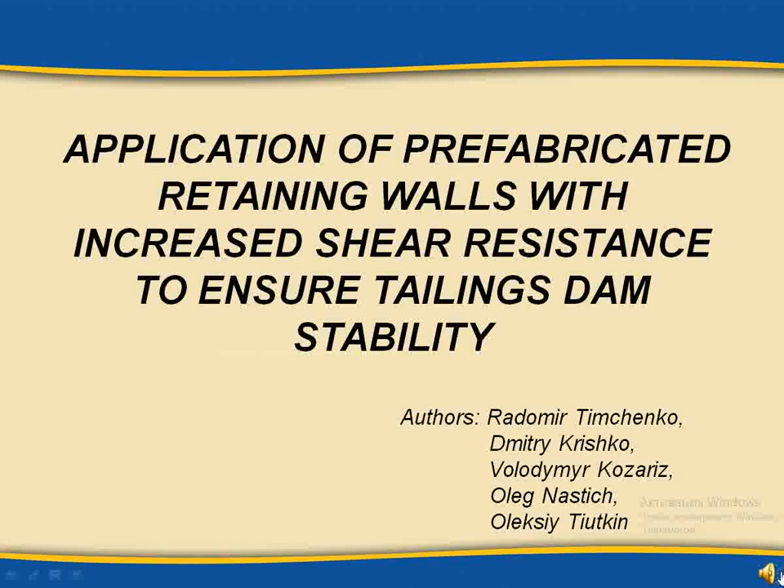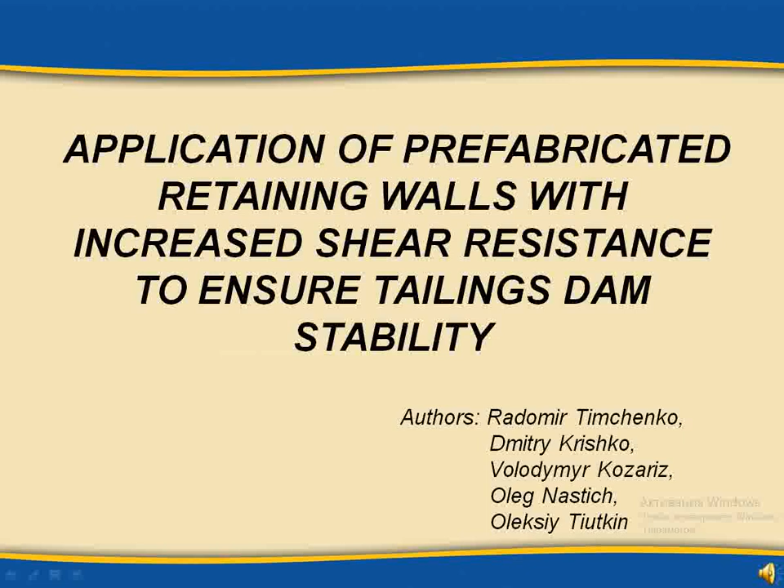Application of prefabricated retaining walls with increased shear resistance to ensure tailings dam stability. Authors: Radomir Timchenko, Dmitry Krishko, Volodymyr Kozariz, Oleg Nastich, Oleksiy Tiutkin.

Accumulation of a significant amount of industrial waste is associated with the development of the mining and metallurgical industry in Kryvyi Rih. The volumes and areas of production sludge and concentration tailings have grown considerably over the long term of operation. This negatively affects the state of technological and environmental safety and worsens the environmental situation in the adjacent areas.

Tailings ponds and sludge storage facilities do not currently meet modern standards that regulate the requirements for operational safety, reliability, stability, and durability as they were designed in the last century. Application of retaining walls is proposed to prevent or avoid the negative engineering conditions of dams and embankments. The development of new design solutions for retaining walls and calculation methods for determining the lateral pressure of multilayer backfill is an urgent scientific task.

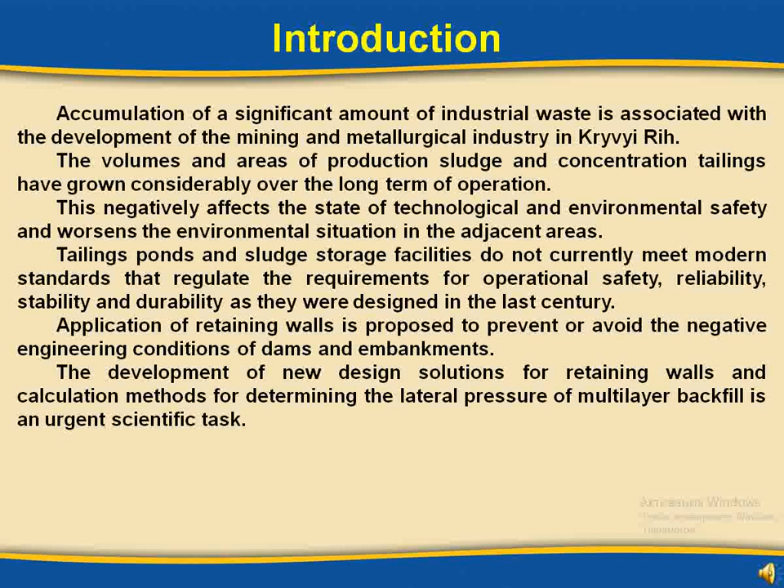The operation of tailings and sludge storage facilities is the subject of research by many world-class scientists, namely Emily Laine, Matthew Kryman, Benjamin K. Sovacool, Donald East, Ruben Fernandez, Carlos Cacciuttolo, Alvar Pastor, Patricio Valderrama, Edison Atencio, John Wates.

Authors who made a significant contribution to the development and improvement of retaining wall structures and methods of their calculation include I. P. Boiko, A. Y. Budin, B. F. Horiunov, V. B. Hurevych, M. P. Dubrovskyi, V. S. Zelenskyi, M. L. Zotsenko, Yu. O. Kirichek, H. K. Klein, V. D. Kostiukov, O. O. Petrakov, M. B. Poizner, V. H. Taranov, R. O. Timchenko, V. H. Shapoval, V. B. Shvets, P. I. Yakovliev, etc.

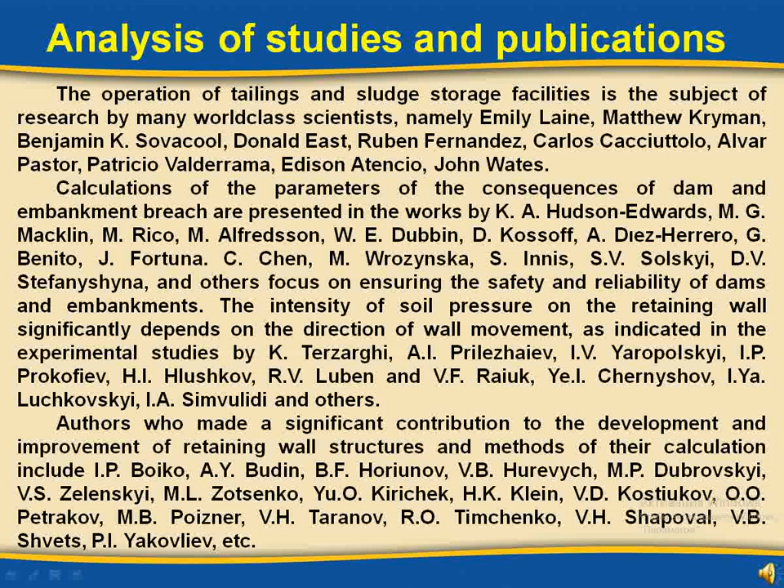The aim of the research is to ensure the stability of tailings dams by using the proposed prefabricated retaining walls with increased shear resistance during the multilayer backfill buildup and operation of the structure. To achieve this, the following tasks should be solved. To conduct an analytical review of the schemes and designs of tailings dams.

To conduct a comparative analysis using the recommended methods to determine the safety factor for the calculated sliding curves. To develop a new design of the retaining wall to ensure the stability of the enclosing dams. To formulate new principles for determining the horizontal pressure on the retaining wall, considering the multilayer backfill and the load on the surface.

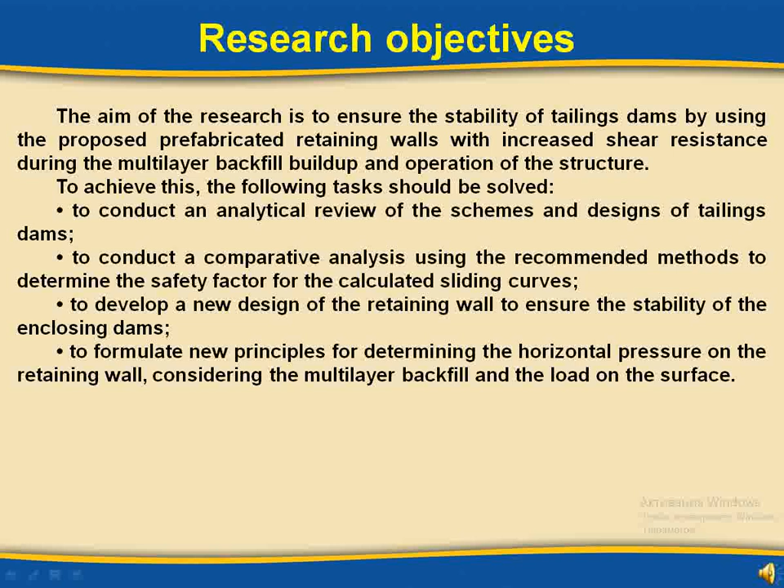In recent years, significant experience has been gained in the operation of storage facilities and the construction of dams and embankments made of waste and overburden. Any type of storage capacity, except for pit and basin ones, requires the construction of enclosing dams or embankments that are washed from waste materials or filled with overburden or local soils. Depending on the technical conditions, enclosing dams or embankments can be built to their full height at once or in stages.

Myroliubivka Tailings Pond is located on Velyka Krokva Gully, its slopes and adjacent areas. Velyka Krokva Gully flows into Hrushevata Gully. The area around tailings ponds is built up with technological facilities and communications. Temporary man-made, rock-filled and hydraulic formations, such as waste dumps, walls of embankments and dams, roads, sludge in tailings ponds, etc., play a significant role in the geological structure of the area. These formations are often tens of meters high.

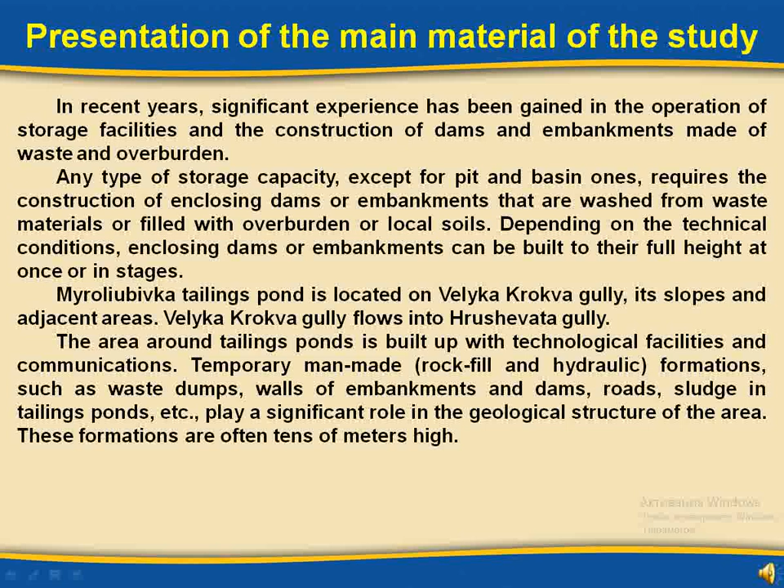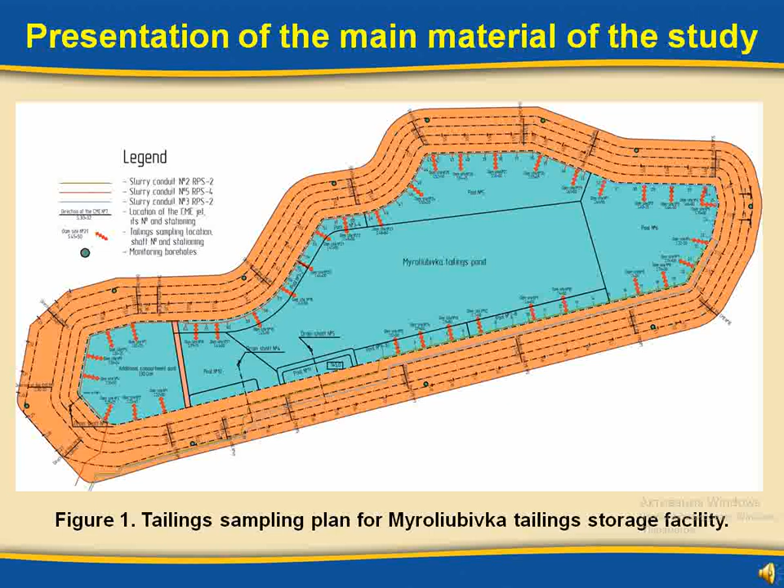To control the quality of the washed tailings, the Geotechnical Control Service, GCS, took 185 samples in 23 boreholes, figure 1, on the beaches at the dike at the 140.0 m level. Based on the results of the measurements, graphs of subsidence are built, figure 2, figure 3, figure 4, figure 5.

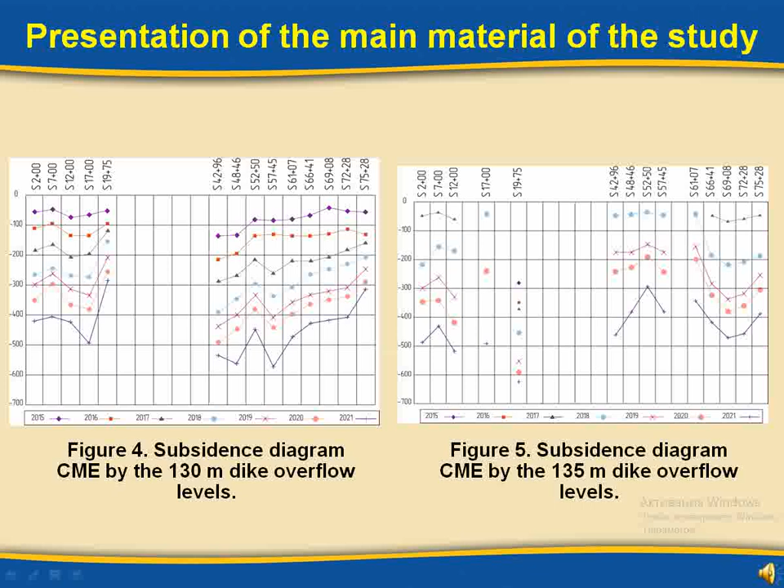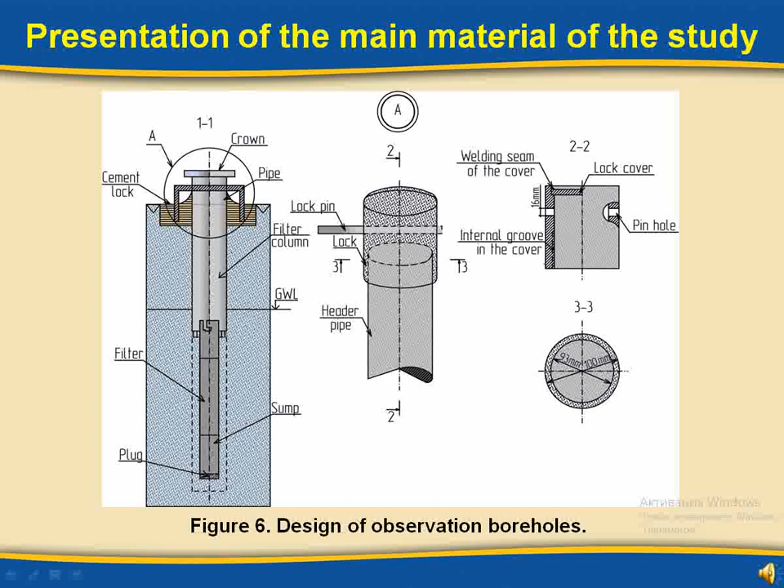To monitor the depression curve, water levels are measured quarterly in piezometers, figure 6, installed on the dams at 115.0 m, 120.0 m, 125.0 m, 130.0 m and 135.0 m crest levels.

Strength and stability of modern hydraulic facilities are assessed by the limit state method, according to which all the initial design values, which are random in nature, are represented by some deterministic values, and the impact of this variability on structure reliability is taken into account by relevant coefficients regulated by the standards.

In determining the dam stability in the vicinity of spillway structure 3, the following design case is considered. As for the main load combination, the dam has a 125.0 m crest, a normal retaining level, 123.5 m, in the upstream, and filtration in the dam body.

The dam stability is calculated by two programs, the Computer-Aided Design System for Ground Hydraulic Structures and the KZU-86K program developed by specialists of the VIOGEM Institute, the All-Russian Research Institute for Mineral Deposits Drainage, Protection of Engineering Structures from Flooding, Special Mining Works, Geomechanics, Geophysics, Hydrotechnics, Geology and Mine Surveying.

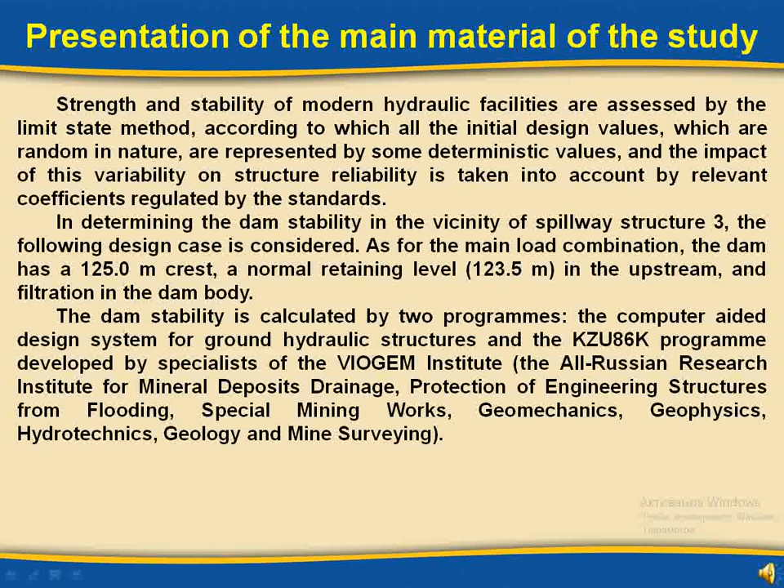The Computer-Aided Design System for Soil Hydraulic Structures, CAD-SHS, is designed to solve a number of problems in designing dams, dikes, upland ditches, sludge ponds, tailings dams and other structures. The software allows performing stability calculations using the following methods. Terzaghi weight pressure method. Mozhevytynov method of inclined interaction forces, recommended by the standard. FEM, the finite element method.

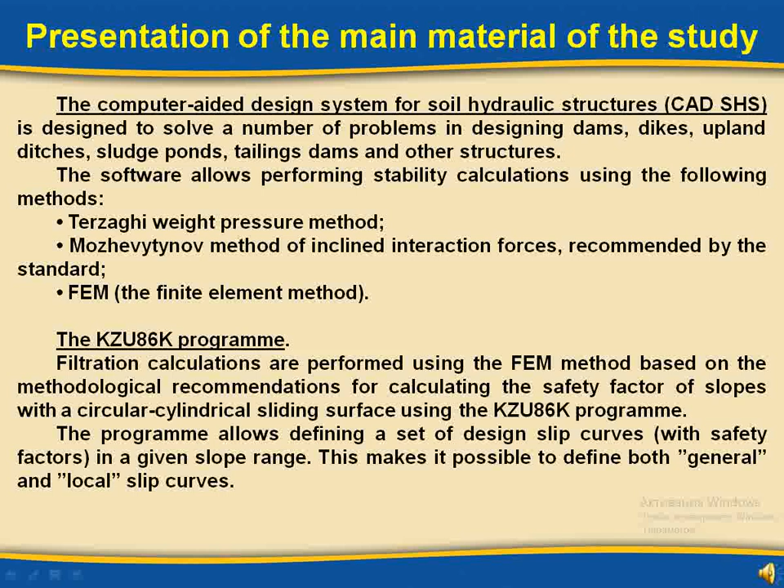The KZU-86K program. Filtration calculations are performed using the FEM method based on the methodological recommendations for calculating the safety factor of slopes with a circular cylindrical sliding surface using the KZU-86K program. The program allows defining a set of design slip curves, with safety factors, in a given slope range. This makes it possible to define both general and local slip curves.

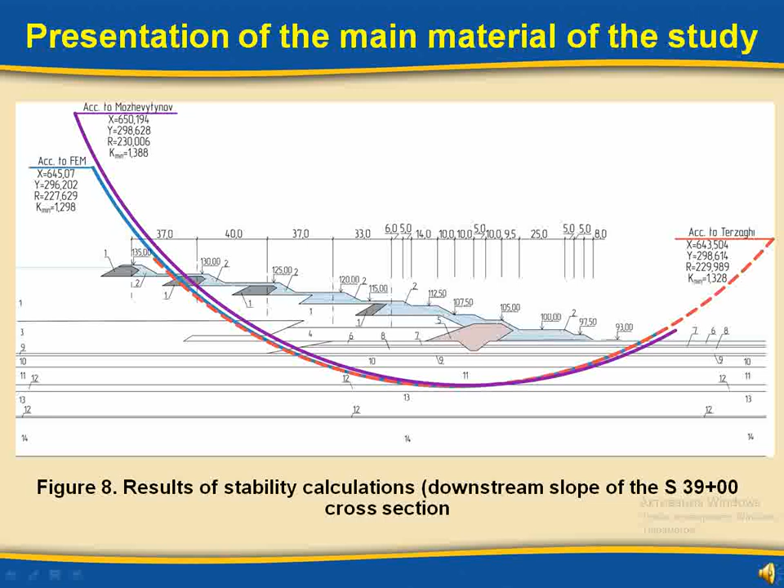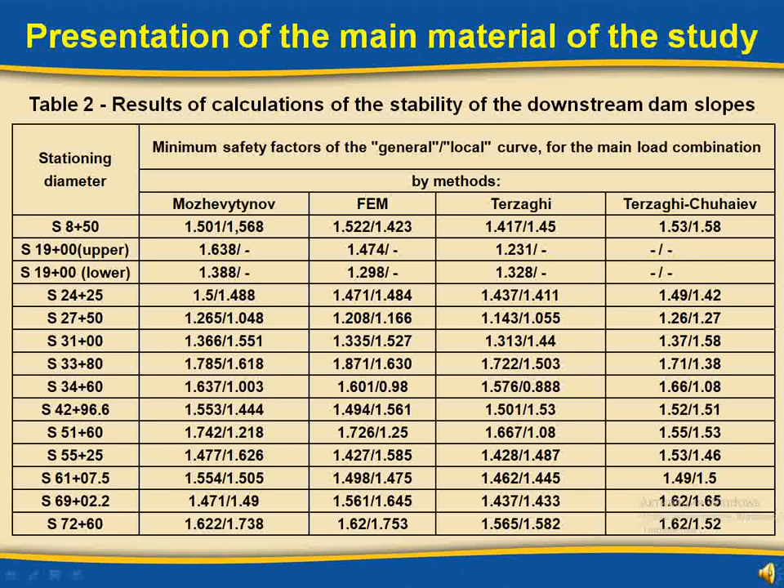The results of stability calculations are expressed as slip curves on the cross-sections of station S, 39 plus 00, downstream slope, Figure 8. The results of calculations of the stability of the downstream slope of the dam, with the selection of the minimum safety factors determined for the local curve, are shown in the design sections and summarized in Table 2.

Analysis of the actual condition of hydraulic structures, taking into account the calculations performed, draws the following conclusions about Myroliubivka tailings storage facility. The reliability of the downstream slope of the tailings dam at Myroliubivka tailings storage facility is assessed in accordance with regulatory requirements. Most calculated cross-sections, according to all the methods used to calculate the downstream slope, have a safety factor, both for general and local stability, that is higher than the minimum required by the standard.

For certain cross-sections, minimum safety factors determined are less than the required standard values. For these sections, additional measures to ensure standard stability are required. According to the standard, Kryvyi Rih is classified as an area with a seismic intensity of 6 points. Soil conditions at Myroliubivka tailings pond are classified as Category 3. At the same time, the overall seismicity of the area is 6 points and it does not fall within the seismicity standard. On this basis, no seismic stability checks are performed at this stage of work.

Recommended measures include: all hydraulic structures of Myroliubivka tailings facility should be subjected to constant monitoring of the dam condition, compliance with design requirements for tailings allocation technology, the degree of wear of pipelines, especially those passing through dams and in the vicinity of hydraulic structures, and compliance with design water levels in the tailings facility. To ensure the required reliability of the tailings facility, it is proposed to construct a special type of retaining wall in the area with the lowest safety factor for the period of dam operation.

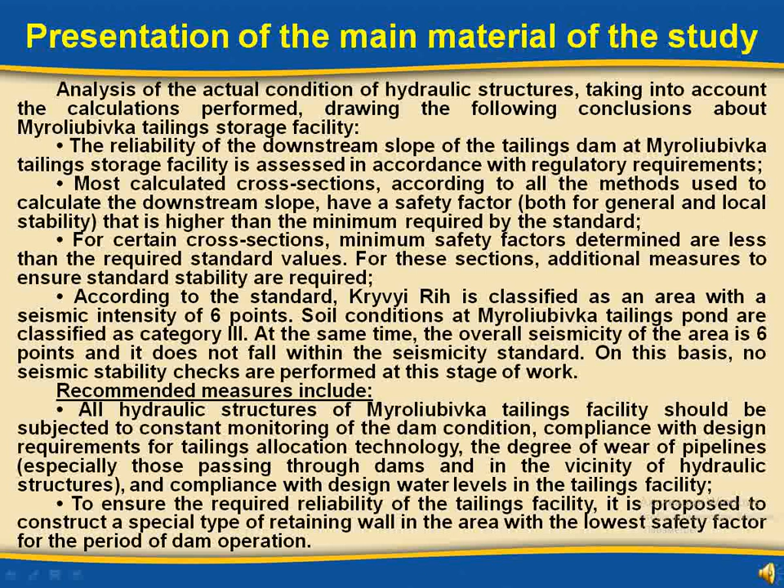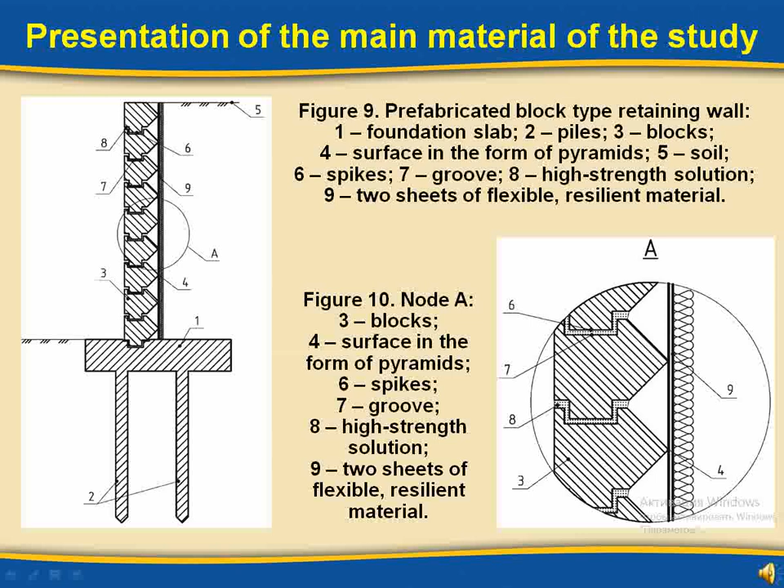The proposed prefabricated block-type retaining wall, Figure 9, Figure 10, consists of a foundation slab and a vertical element presented in the form of concrete or reinforced concrete blocks mounted on top of each other. The front face of each of them is made straight, and the back face is in the form of a structural surface of pyramids. The foundation slab of the retaining wall is equipped with piles located directly under the base of the foundation slab. To prevent premature filling of the cavities, two flexible separating sheets of elastic and pliable material made of a biodegradable polymer are placed on the back surface of the vertical element.

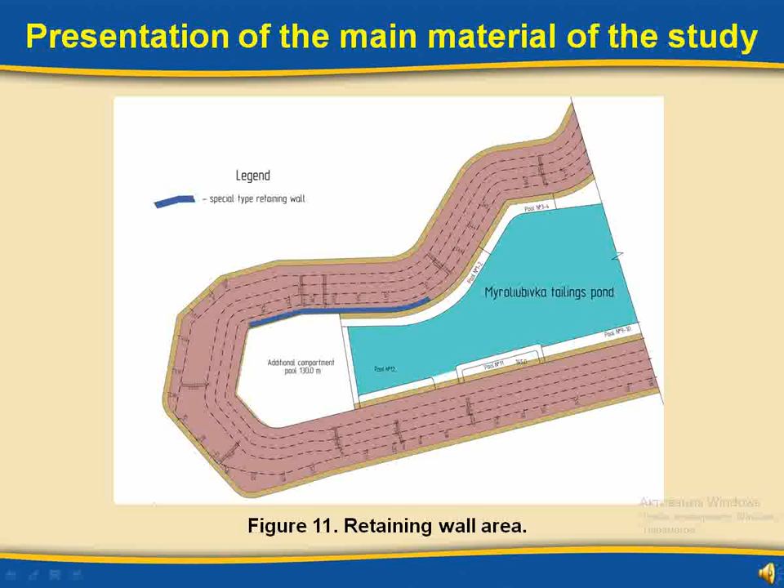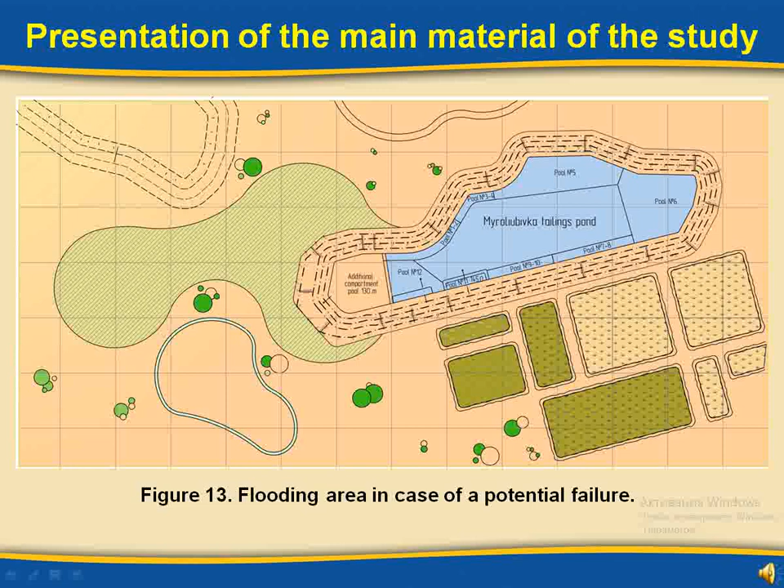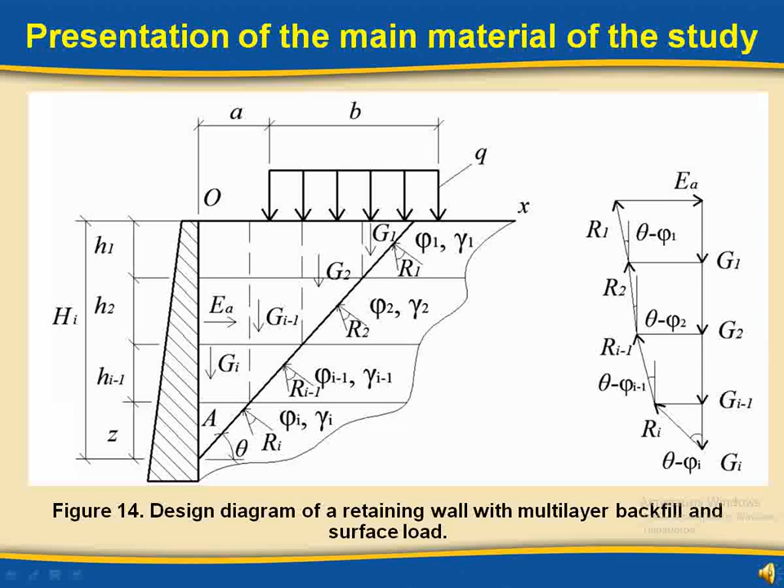The paper analyses experimental and theoretical studies of distribution of sliding planes in multilayer backfill of retaining walls in the absence and presence of different strip loads on this surface. These studies indicate that horizontal shear of the entire wall or any of its upper parts leads to the formation of a single shear plane under not only complex but also concentrated loads on multilayer backfill. Moreover, this effect does not depend on the sequence of layers with different physical and mechanical characteristics phi and gamma along the backfill depth. Adoption of a single sliding plane for each depth of the retaining wall allows presenting a calculation scheme for determining the horizontal pressure, Figure 14, and formulating new principles for determining the horizontal pressure on the retaining wall, taking into account the multilayer backfill and the load on the surface in accordance with the standard.

Myroliubivka Tailings Pond is an engineering structure of the first category of responsibility and currently requires new approaches, as well as changes in technology to ensure its stability during long service life. Available calculation methods based on the theory of linearly deformed media do not fully meet the operating conditions. Therefore, consideration of the influence of a multilayer nonlinearly deformed massif under external loading allows formulating new principles for determining the horizontal pressure on the retaining wall, namely, the mass of soil between the wall and the shear plane is divided into separate prisms resting within each layer on the collapse plane. The prisms are divided by vertical planes extending from the intersection of the collapse area with the boundaries of the soil layers to the backfill surface, in areas of loaded surface, or to the footwall of the local load.

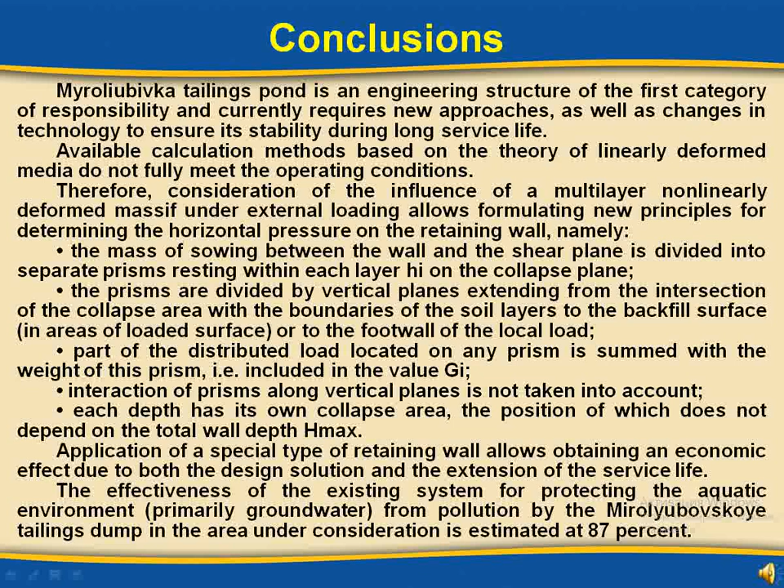Part of the distributed load located on any prism is summed with the weight of this prism, i.e. included in the value Gi. Interaction of prisms along vertical planes is not taken into account. Each depth has its own collapse area, the position of which does not depend on the total wall depth Hmax. Application of a special type of retaining wall allows obtaining an economic effect due to both the design solution and the extension of the service life. The effectiveness of the existing system for protecting the aquatic environment, primarily groundwater, from pollution by the Myroliubivka tailings dump in the area under consideration is estimated at 87%.